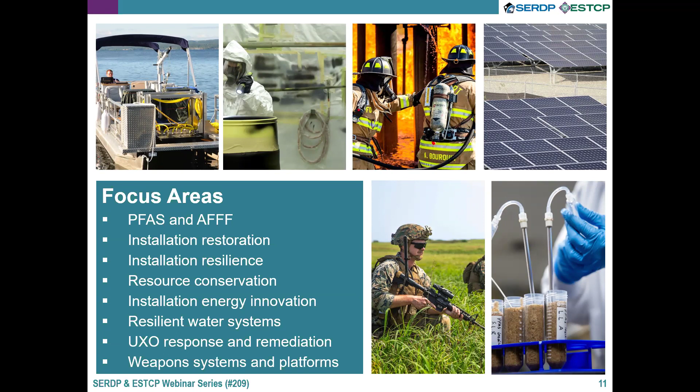ESTCP is the Environmental Security Technology Certification Program, in which we demonstrate and validate innovative environmental and installation energy technologies. These investments capitalize on past investments under SERDP or other research programs and are designed to transition technology out of the lab and into the field. Especially important in all ESTCP demonstrations is the ultimate transition to implementation and regulatory acceptance. Advances in science and technology provide the DoD with the tools needed to effectively manage and restore its assets to protect troops, their families, the public, and the environment. SERDP and ESTCP investments improve installation and energy resilience, environmental cleanup, UXO remediation, resource conservation, and the sustainment and maintenance of defense assets.

SERDP and ESTCP fund, monitor, and actively guide relevant and applied research, development, testing, and evaluation projects for the DoD's top environment and installation energy challenges. Our programs currently fund over 600 active projects. To maximize research impact, SERDP and ESTCP collaborate with top talent across sectors. In 2023, we funded projects at 77 academic institutions, 91 federal performers, and 52 industry partners. Our innovation and technology development inform DoD policy to ultimately improve environmental and energy management.

SERDP and ESTCP are funding a broad range of PFAS-related projects. You can access an overview of our PFAS programs as well as project descriptions on our website.

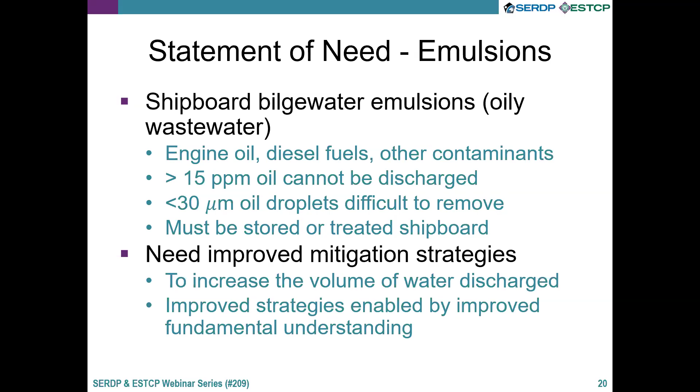Likewise, we look at firefighting foams. This is another complex multi-phase system. In firefighting foams, there's air, the bubbles inside the foam, water, and additives inside the water phase to create the foam, things like surfactants, maybe polymers, other compounds.

There's fuels—these are Class B firefighting foams, so they're spread on a liquid fuel. You can have emulsification of the fuel in the foam blanket, and the foam fuel vapor. You're trying to prevent fuel vapor transport across the foam, so you can have fuel vapor getting into the foam, and condensation of the fuel. The fuel is quite important for foam stability.

And then possible salts, depending on the water source. Maybe seawater would have quite a bit of salt.

Traditionally, these firefighting foams contain PFAS materials that work to enable film formation, so you have a foam over the fuel, and a thin liquid film will form between the foam and the fuel and spread across the fuel surface. This is remarkable because water has a high surface energy and the fuel has a low surface energy, and it's difficult to make high surface energy spread on low. But the PFAS materials have a unique property that enables that film formation and thermodynamic favorability for spreading.

However, these PFAS material exposures are known to associate with health effects, and now there's a need for improved formulations that replace PFAS. To enable improved formulation, we need improved fundamental understanding of how these systems are stabilized.

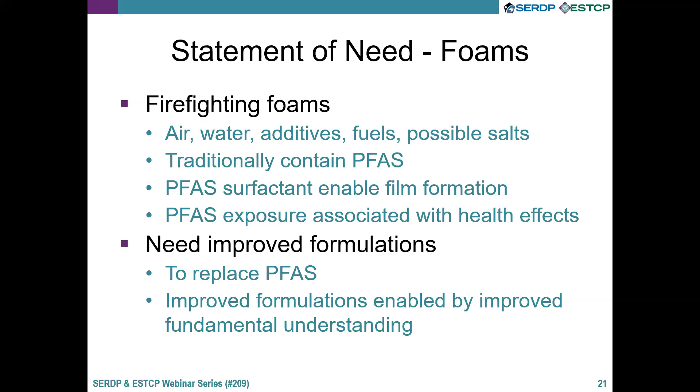Our group really focuses on the soluble surfactants and their transport mechanism—how they get to interfaces, and how they stabilize them—because both bilgewater emulsions and firefighting foams contain these surfactants.

These surfactants will move to interfaces through processes like diffusion as soon as an interface is present. Then, once in the subphase, the processes of adsorption and desorption occur until equilibrium is reached.

As these surfactants adsorb, they lower the interfacial tension and also lower the excess energy per area. That's important because oil and water, or water and air, want to phase separate. But when you lower the interfacial tension, you lower the thermodynamic penalty of having that interface there, enabling stabilized foams and emulsions.

But that behavior of the surfactant—how it gets to interfaces, and what's really going on at the interface, especially in dynamic conditions where things are changing, flowing, and there are gradients—really varies depending on the surfactant type, its concentration, and its local environment.

What's the viscosity around it? Even the size of the bubble or droplet matters—the curvature of the interface will inform some of the transport rates to that interface and the underlying transport mechanism.

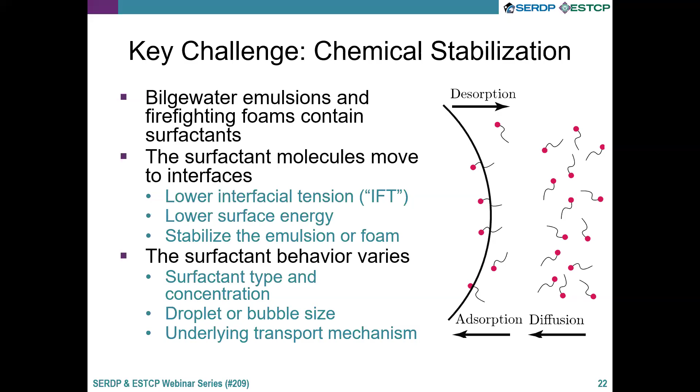So in our approach to study these soluble surfactants, we take two approaches. First, we measure the adsorption to a single interface. We do this with bubbles and droplets, across length scales.

We start with macroscale techniques like the pendant drop or a rising bubble, where the approach is to measure interfacial tension by looking at the shape deformation of the bubble or drop, then use the Young-Laplace equations to get surface tension from there. That uses gravity to help deform the bubble and drop.

Then we push down to microscale methods like the microfluidic tensiometer, where bubbles are deformed in flow, and static environments like the capillary pressure microtensiometer, through a collaboration with Joe Zasadzinski at the University of Minnesota, to measure transport to a highly curved interface at length scales quite relevant to our application.

But it's not just about getting surfactants to a single interface. Ultimately, in foams and emulsions, it's not just single interfaces but two interfaces near each other that matter. It's the thin films that form between bubbles, drops, or fuel droplets that inform stability. So we look at the film between two drops and two bubbles and study the film drainage and rupture time.

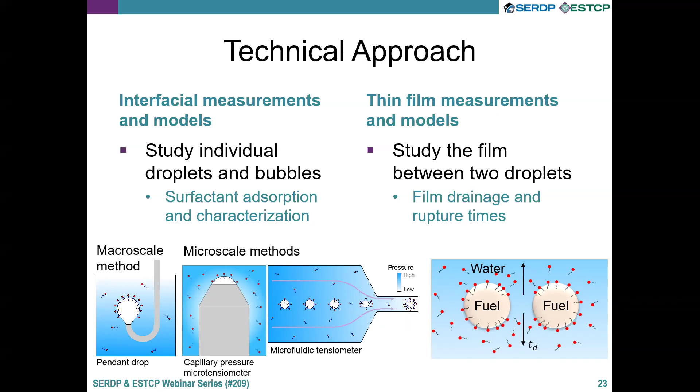We do this for a variety of systems. These are largely informed through collaborations with co-investigators at DoD laboratories, for systems relevant to emulsions and foams of interest. We look at hydrocarbon surfactants, alkylpolyglycosides, and siloxane surfactants and their mixtures that have shown synergism against fire, as well as informed by our prior SERDP effort with simulated detergent mix and bilgewater mixes recommended through Carderock.

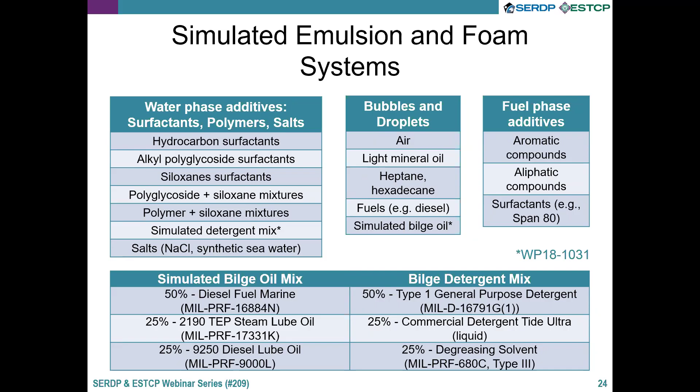Looking at these systems, for our water phase we add different things like salts, surfactants and polymers. Our disperse phase can be bubbles for the foams, the air, but it can also be things like light mineral oil to mimic engine oil, or different fuels in the simulated mix. The fuel phase itself can be quite complex, with different compounds, additives, and even surfactants present in those phases.

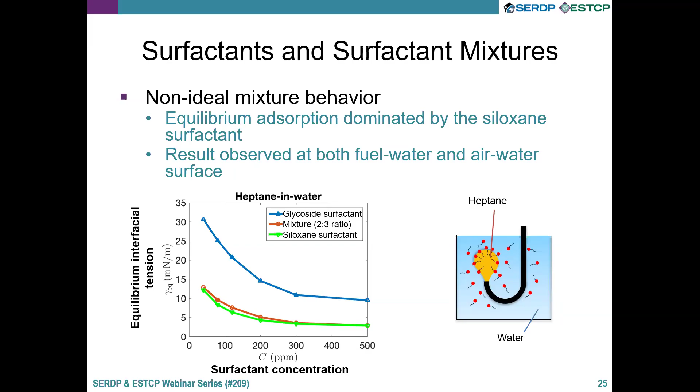Against the surface, you've got a certain region that would contain all the surfactant needed to cover that interface at equilibrium. So there's some volume at that bulk concentration that would contain the surfactant needed to cover the interface. As you begin to curve the interface and have more and more area, the depth of that volume will decrease—so the depletion depth gets smaller. That depletion depth defines the difference between the bulk and the surface, and it's the length scale for the diffusional mass flux. So it gets smaller and smaller, faster and faster, and you see this acceleration.

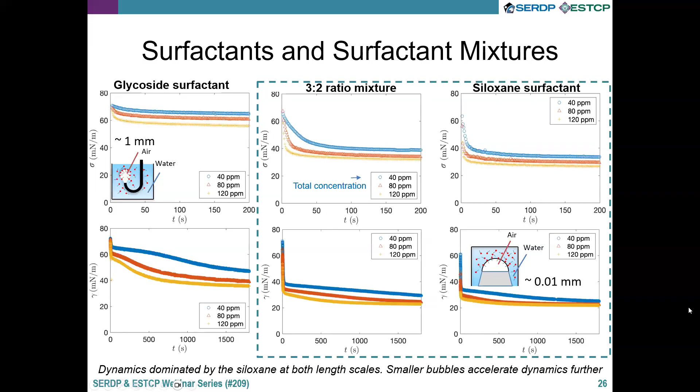We take those diffusion-limited measurements and begin to calculate traditional metrics like critical micelle concentration, the diffusivity by fitting the time-dependent response to a mass flux equation, maximum surface coverage—which is quite important, though it doesn't tend to vary much between surfactants—and things like equilibrium constants, depending on what isotherm you use. I'm plotting here some representative values of equilibrium constants for different glycosides and siloxane surfactants and their mixtures, and how they might compare to other common surfactants.

And so this varies over orders of magnitude, and it could potentially be a metric for the stability of the foam and film, because if you dig into this equilibrium constant, this is actually the ratio of the adsorption and desorption rate of the surfactant.

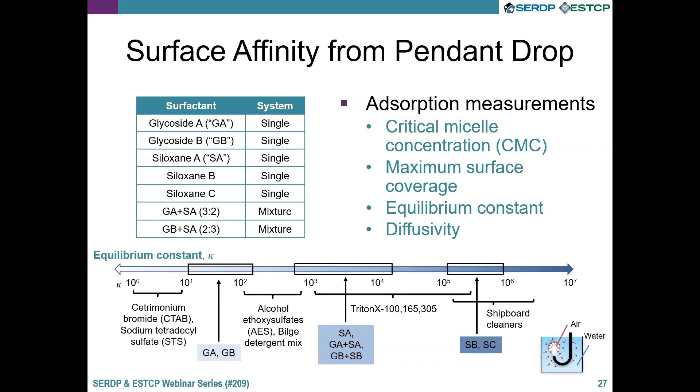Now from pendant drop, you'll just get the ratio, but if you have this other measurement technique where you can push yourself out of the diffusion limited regime, with the second method you can then not just get the ratio, but the individual rates. So you can tease out both the adsorption and desorption rate constants.

We do this as a function of concentration of surfactant, of temperature, and then I thought this was an interesting one to highlight: phase of the surfactant. So you can imagine a wet or a dry bilge, so oil and water or water and oil, but the phase that the surfactant's in will dictate the rate at which it's adsorbed.

And this is somewhat well known, there's a Bancroft rule of thumb that if you had water and oil and surfactant and you shake it up, do you get water in oil or oil in water? You'll typically get the system forming where the surfactant, whatever phase the surfactant is soluble in, tends to be the continuous phase. So it'll tend to form these Bancroft type emulsions.

And what we show is that when you have this configuration, you typically will have faster adsorption to that interface. So it aligns well with that rule of thumb, that you would have this be the stabilized system. So we're going to look into this a little bit more in a few slides.

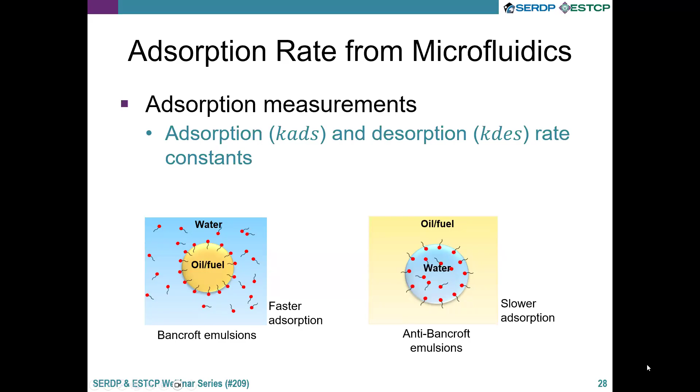In addition to looking at measurements to individual interfaces, ultimately we want to know how stable those interfaces are as they approach each other, because you have a number of thin films present in emulsions and foams, and coalescence between drops and bubbles is one of the key mechanisms for destabilization, among some others, and they're present in both emulsions and foams.

So we use microfluidic methods to create an array of droplets and bubbles, and we look at coalescence events. Shown here is an example with a number of bubbles formed as a function of Triton X concentration. You can see differences in their size distribution and in their coalescence dynamics. In general, the lower the coalescence frequency, the more stable the system.

And then we dig in closer where we look not just at ensemble kinetics, but individual events. We can use a microfluidic Stokes trap where we control the pressures in each of these channels, and there's a stagnation point in the middle, and we can trap one droplet or one bubble and then throw another one at it and look at the time it takes for those two drops to merge.

Coalescence is a really complicated process. You've got the outer problem of the rate at which they collide, the angle at which they collide, and then once they come in contact and you've got that thin film that forms between them, they don't immediately merge. There's a timescale associated with that film draining from a thick to a thin film.

That's largely dominated by changes in capillary pressure. And then a thin film to a very thin film, on the order of nanometers, where you'll start to have instability and rupture. So each of these three phases has its own metric and parameters that define it. But in general, the longer it takes, the more stable that foam and emulsion.

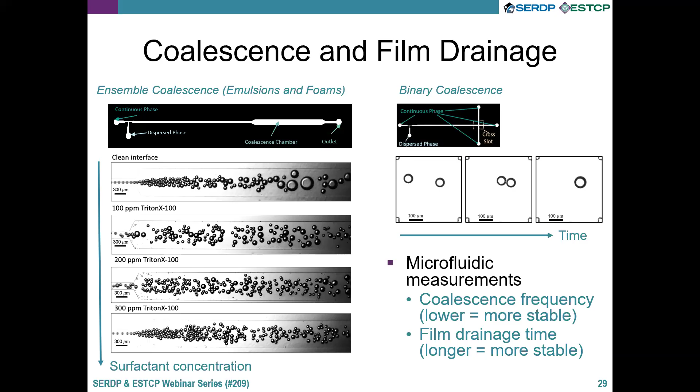So we look at coalescence across that wide range of systems I showed you earlier, including the effect of salt. I thought this was an interesting one to highlight because it's somewhat unexpected. Here we have salt in our water-rich phase, and surfactant is in the oil phase, so the only way the salt and the surfactants interact is at the interface.

I'm not showing you that first bullet point, but I can tell you that interfacial measurements show that if you add salt to that aqueous phase and this non-ionic surfactant to the oil phase, you'll see a decrease in the interfacial tension. This is well known, but if you're from outside this field it might be surprising, because salt typically increases interfacial and surface tension in the absence of surfactant. But it interacts with the surfactant so much that it will decrease the interfacial tension when the surfactant is present.

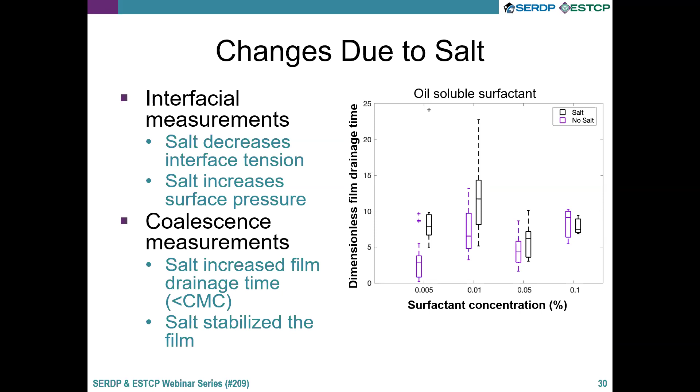And then we look at the coalescence, the dimensionless film drainage time versus concentration. And what we see is that below CMC, the critical micelle concentration, we see increases in the drainage time. It's more stable in the presence of the salt than without the salt, corresponding well to those interfacial tension measurements.

So we look at the effect of additives as well as the effect of viscosity of the fuel phase. This is important because fuel can really range in viscosity because of differences in temperature, but also just inherent to the fuel. Some fuels are less or more viscous than water.

And that viscosity is quite important. Viscosity in general will slow things down, but the ratio will be important. If I had a highly viscous drop, a highly viscous fuel drop in water, and you're trying to coalesce them, it's quite challenging. Even in the absence of surfactant, if you had hexadecane droplets, it's quite difficult to have them coalesce, largely because you're changing the surface stresses and you're changing the mobility of the liquid in that film phase as it's draining.

Conversely, if you had low viscosity droplets, like heptane inside of water, then they more readily coalesce, even in the presence of surfactant.

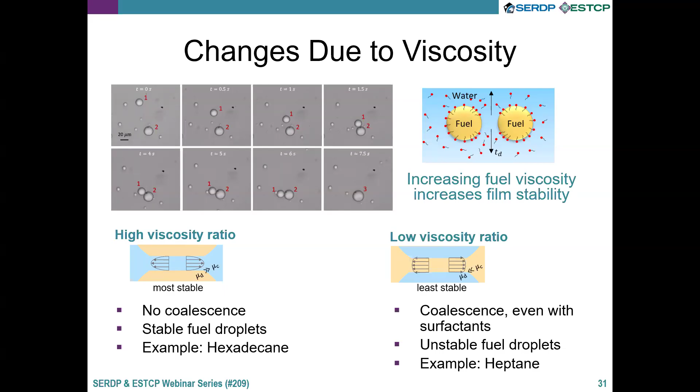So surfactant is important, of course, and in general, if you add surfactant, you stabilize the system. And that's what we see for the most part for most systems, increased film drainage time versus surfactant concentration.

But there are some circumstances where we see some non-monotonic effects. So for example, if you had surfactant in these anti-Bancroft type emulsions, where the surfactant's inside the water phase and we're coalescing it inside this oil, we'll see initially an increase in the drainage time, just like you would expect with increasing surfactant concentration. But then if you add even more surfactant, it actually hurts the stability. It tends to drop down the drainage time up to a point, and then you get quite a bit of scatter in the data.

For Triton X surfactants, we see that scatter happen at CMC. These glucopones, we see them at a little bit lower concentration, but it's a somewhat surprising non-monotonic effect.

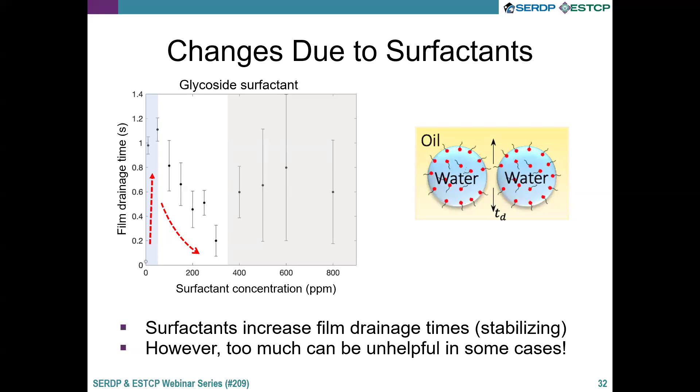So we have all these observations that are interesting, or some are expected, and we take these measurements and then we couple them with some modeling, some fluid dynamic modeling to capture that thin film. This is in collaboration with co-investigator Satish Kumar here at the University of Minnesota, and our co-advised graduate student Xu Yang, and she's looking at the stability of this thin liquid film that forms between the bubbles and the drops. And we think about what are the forces that stabilize and destabilize them.

And one of the key destabilizing mechanisms is because of van der Waals interactions, intermolecular interactions that happen between interfaces, captured by the disjoining pressure, which has what's called the Hamaker constant in it. And for any interface, there's always natural fluctuations because of this natural fluctuation of kinetic energy, thermal energy. And as you have that fluctuation, you'll have moments in time where you have a bit of a trough and a bit of a peak that form.

And for a thin enough film, you'll have quite a difference in the strength of that attractive van der Waals interaction, that the area where it's quite thin, or a little bit thinner than the thicker area, it'll feel a much stronger attraction than the thicker region because of how strongly it depends on the thickness of the film. These will really kick in around 100 nanometers or less. And so these thin areas will have a driving force to get even thinner, and the thick areas even thicker. And that's how you'll get rupture in these thin films.

But these forces are counteracted by stabilizing forces. The first is capillary leveling, that if you had two systems at equilibrium and a flat interface between them, the pressures are the same on both sides. But the moment you have a curved interface, you have a Laplace pressure difference. And so inside bubbles, inside droplets, there's higher pressure than outside of them because of this Laplace pressure needed to stabilize this interface.

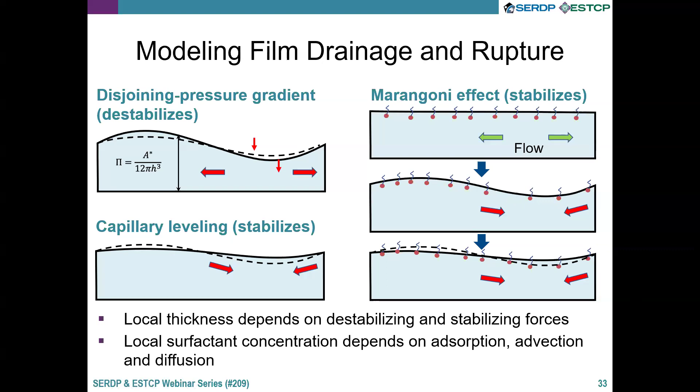So we begin to model monolayers and bilayers, ultimately trilayers. For the bilayers, I'll pause to mention this itself could be interesting to the application, that you could have a thin liquid film of water form on top of the fuel, and we could look at the stability of that thin film in the presence of these surfactants.

We looked at a number of different components, a wide parameter space, but the one I want to highlight here is what happens with the concentration of surfactant. So you're looking at dominant growth rate, a term from linear stability analysis. The higher the rate of growth of an instability, the faster it would rupture.

So this is quickly rupturing. As you go to low dominant growth rates, it's slowly rupturing. So less stable for high values, more stable for low values. And then log of Marangoni numbers, you could think of that as a metric for the concentration of the surfactant.

As you add surfactant, you stabilize the system, regardless of what interface, although depending on what interface, you stabilize it to different degrees. But what's interesting is if you add too much surfactant and you drop the interfacial tension too much, you actually can destabilize the system.

So Marangoni stresses are always stabilizing. But what happens here is you're dropping the interfacial tension so much that you're suppressing that stabilizing capillary pressure difference. And you're also suppressing and decreasing the capillary length scale, making your interface easier to deform. So in these really thin films, that becomes quite important, and you can cause rupture to happen more readily. So you can have enough surfactant to help, but too much could hurt in that scenario.

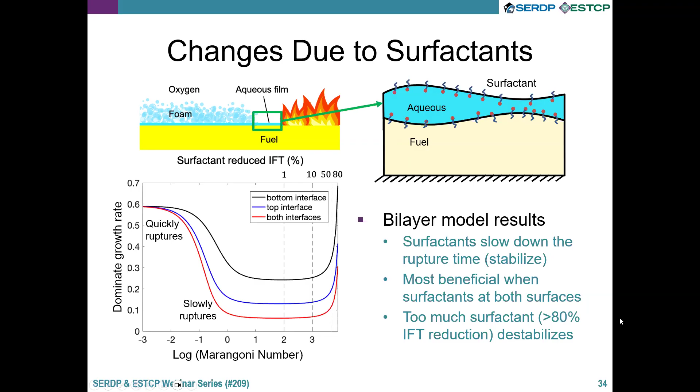So that's the non-monotonic effect. And then we built up to the tri-layer, so now we're more closely mimicking the emulsions and the foams, where you would have a disperse phase and then the thin film between it. So here, when you zoom in, you would think of the film of interest as this is actually the continuous phase, that's what's the film between the two disperse phases.

And then these outer films would be a mimic of the drop phase. And so we look at this as functions of surfactant concentration and even looking at different rates of diffusion limited, adsorption limited processes, and even viscosity ratio like we did in the experiments. And in general, if you increase the viscosity, you do tend to slow things down. But just like with the experiments, the ratio matters.

If you have a more viscous droplet phase or a more viscous outer phase, you'll stabilize the system more than if you had the other way around. And what's nice about the modeling is you can begin to zoom in not just on the thickness of the film, but also the surfactant coverage at the location, and you can recover velocity gradients.

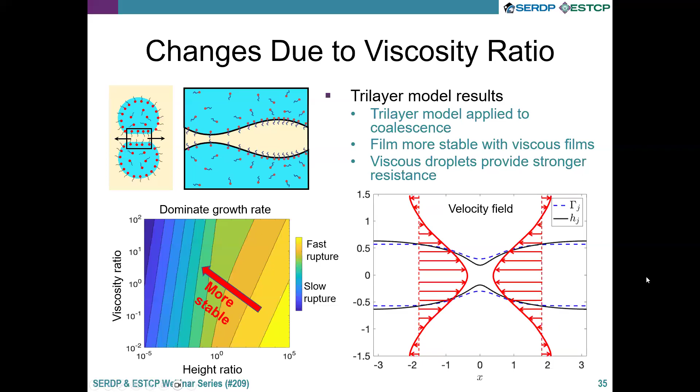And so you can begin to tease out some more complex mechanisms of stability, like that Bancroft rule. So if we add surfactant to different phases, as we saw earlier in the experiments, we saw these faster adsorption when surfactants are from the outside and the inside, and these tend to be the more stable system. So we looked at the same system, but in the thin film environment.

So what's happening is when you're coming from the inside, where you have these two surfaces in this thin area, versus outside, you have differences in the concentration gradients that are set up in the fluxes at the interface. So you'll have different rates at which the surfactants will adsorb, and you can erase some surfactant concentration gradients at the surface that'll weaken Marangoni stresses and then either stabilize or destabilize that interface.

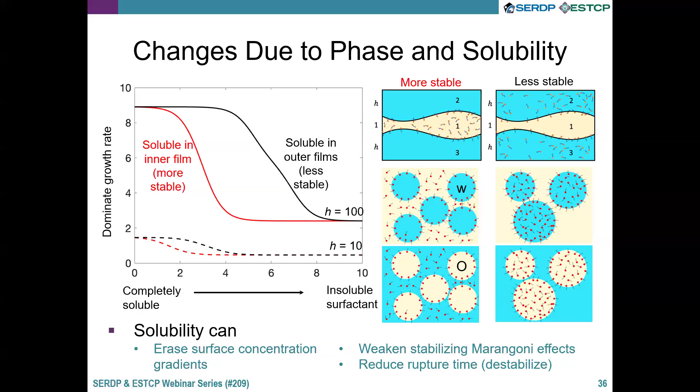We've looked at a number of different scenarios with the modeling and with these measurements, and we can look at the effect of composition of surfactants, salts, and fuels on the adsorption and on the stability. We did polymers as well, I just haven't mentioned it in this talk. We focused on both the equilibrium properties, but really trying to get at dynamics and seeing that this faster surfactant will dominate the behavior.

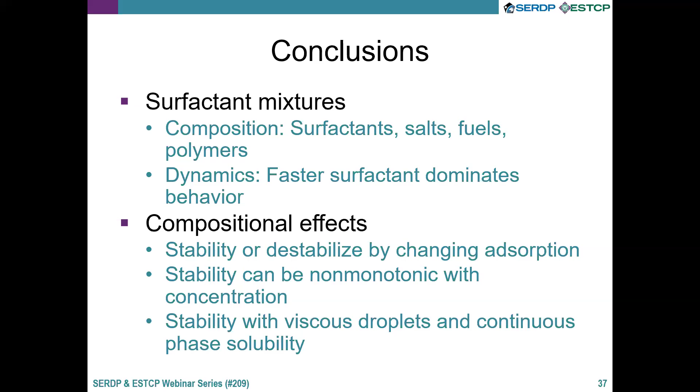We also looked at compositional effects, and we found some surprising and some expected behaviors where you see changes of stability with changing adsorption. We also saw the non-monotonic effect from concentration, and then stability with these viscous droplets and continuous phase solubility.

We did this with these end applications in mind. So all the systems we looked at were informed by systems that are typical to these bilgewater systems or firefighting foams, and have enabled some new measurements and modeling platforms, as well as some modeling methods and results that can be used in a diagnostic way to inform operation, mitigation strategy, and formulation.

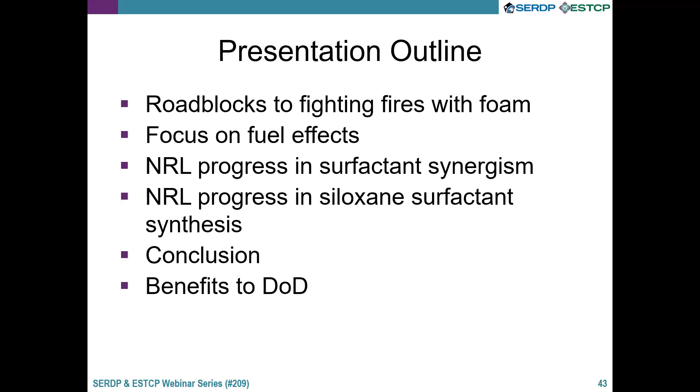I wanted to go over the history of AFFF and the use of foams to fight fires. Foams have been used since the 1940s to extinguish liquid fuel pool fires, specifically because when you have a fuel pool on fire and you try to put water onto that surface, since water is more dense than the fuel layer, the water just sinks below the surface, and you're not actually applying an agent to the fire interface at the fuel-air interface.

When you use a foam, the foam is less dense than the fuel, and the water that is in that foam layer cools the fuel surface and acts as your fire suppressant.

In the 1940s, it was acceptable to just use anything—soaps, protein-based surfactants—and it was deemed good enough to extinguish a fire. However, there were situations, particularly for military use, in which that was just not good enough.

We would have situations where as soon as a firefighter extinguished one area of the flame, it would reignite. This is a really big deal when you think about large pool fires. You might picture a small grease trap, but you have to think about this on the scale of an entire flight deck, a very large area on fire. As firefighters move forward into that fire, they need assurance that the area already extinguished is not going to reignite. This was not the case for these inferior protein-based foams.

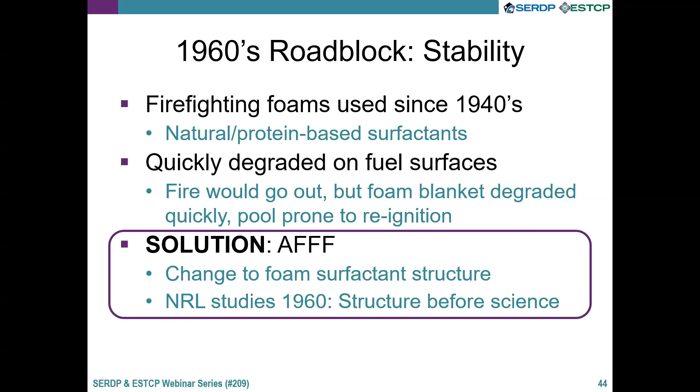In the 2000s, there was the big realization that the fluorinated surfactant used in these AFFFs had a byproduct, PFAS, that would go into the ground, and the fluorinated tail of the surfactants just wouldn't degrade—it would stick around in the environment for a very long time. There was a huge push to find replacements for these surfactants in firefighting foams. Unfortunately, between when AFFF was introduced and when we needed to find replacements, science had caught up and showed that the surfactant is quite key to the fire extinction process—that the surfactant itself, potentially through a variety of mechanisms, is what is actually extinguishing the fire.

It's not necessarily just the presence of the foam itself creating that barrier delivering that water - their surfactant is really key, and not all surfactants could extinguish a fire. Because they were focused on the importance of the surfactant in AFFF, it was really hard to find an alternative surfactant. So what ended up happening is there was a reliance on natural and protein-based surfactants that had been developed and were considered more environmentally friendly.

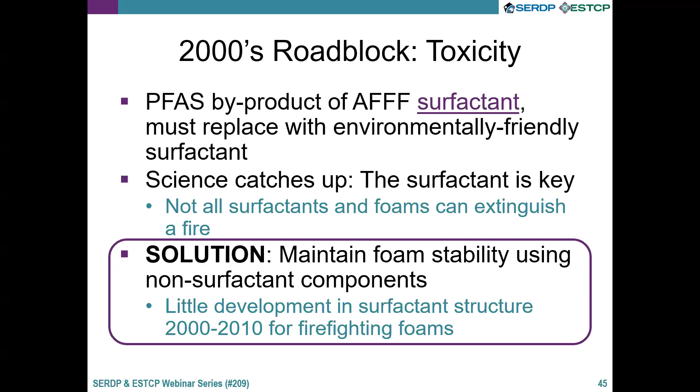But could we add things to these mixtures to just make them better? So instead of focusing on a massive change in surfactant chemistry, can we make small adjustments through additives and other ingredients that will help get our firefighting foam to the level of AFFF without having that fluorinated component? There were significant developments in understanding foam solution and foam property behavior, but most of it was not surfactant based. So there was a lot of gap time in trying to better understand firefighting foams in which surfactant development was not the key.

Slide 46. What was the key at this time was additives and the focus on the foam layer and film formation. AFFF, aqueous film forming foam, refers to a foam solution that has a low enough surface tension that an equation based on the spreading coefficient is positive. The only way for this to happen, to thermodynamically have a film spread onto a fuel surface, is if your foam solution has a significantly low surface tension.

Fluorinated surfactants achieve this - they have solution surface tensions less than 20 millinewtons per meter, and that was what people were focusing on. People were focusing on this film, the presence of the film in fire suppression.

And if you couldn't achieve it through surface tension, could you achieve it through something else? There was this idea that liquid drainage from the foam could be very key in fire suppression. Could you get something that drained slow enough over time that it could create a pseudo film layer? To get that slow drainage, you needed a very stable foam, and you needed to increase solution viscosity. You ended up with very thick fluorine-free foams trying to recreate this film formation that was not thermodynamically possible.

But in considering both of these mechanisms, it's understandable how we would measure foams and come to these conclusions, but they're really void of the fire environment. Both of these measurements don't really consider how foams behave in a fire environment. And at NRL, we wanted to probe that further.

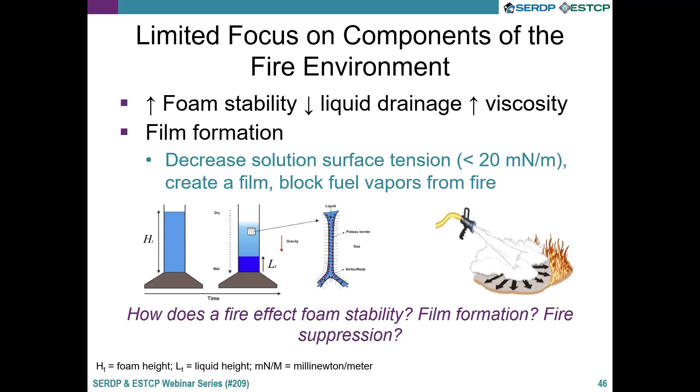Slide 47. So what we found is, let's just take some components of a fire environment. For us, a major component was the fuel. Looking at when you have a fuel pool and it is on fire, what does the presence of the fuel actually do to the foam? We ran these very simple experiments - these are just 4 beakers with a 4 centimeter foam layer in them.

It has a control where the foam is placed on nothing. We have one type of fuel in the second beaker. In the third, we have the foam placed on water. And in the fourth, it is a different type of fuel. As you go down the figures, it's the time at 0 minutes, 1 hour, and 5 hours.

What we found is that the fuel accelerates foam degradation - when you compare the foam over the control or over water, the foams over the fuel degraded faster. So there's something about the interaction between the foam and the fuel layer that we thought was really important for fire suppression.

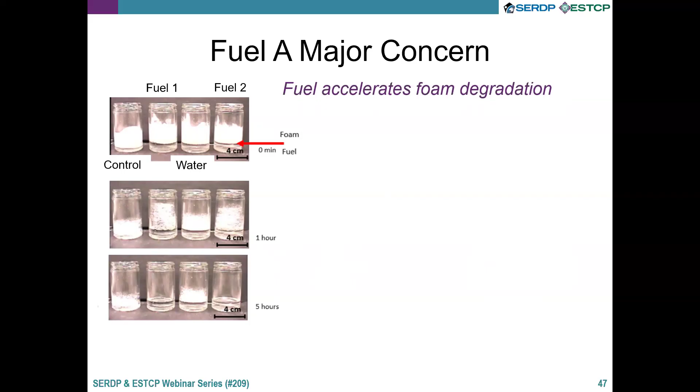So it wasn't just this film formation, but a clear indication of stability of the foam in the presence of fuel. We really wanted to better understand this fuel foam connection, and thought that this was what needed to be focused on, instead of just film formation and foam properties in the absence of fire elements.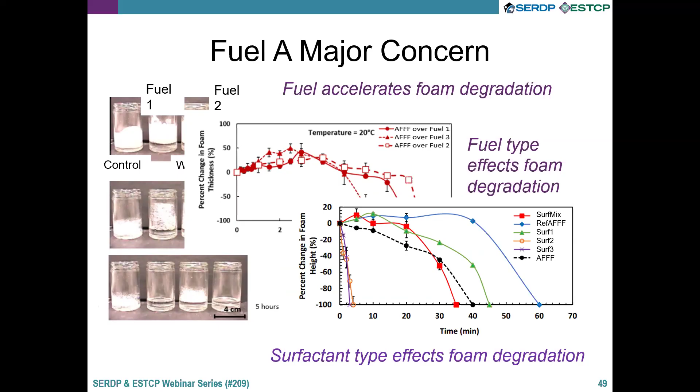So we started to think more about this fuel foam interaction and what would be causing the degradation of the foam surface. An idea that we had is we were considering: you have the fuel layer and the foam layer, and fuel vapors that leave the fuel pool surface and travel through the foam layer. How do they travel through the foam layer?

Each bubble of a foam is surrounded with surfactant that is oriented with the head of the surfactant in the water layer and the tail of the surfactant in the air layer. As fuel vapors come across those interfaces of each bubble, it interacts with the tail structure of the surfactant first. We were considering the fluorinated surfactants and the fluorinated surfactant tail, which is not only resistant to water, but because of the structure of the bonds and the way it interacts with itself and with water and air, it is actually very oleophobic as well.

And it retards fuel transport through the foam layer. You end up with foams that do not have a significant amount of fuel vapor within their foam layers, making them stronger with time. However, if you have a hydrocarbon surfactant where the tail structure is almost identical to the fuel molecules, you have very easy transport through your foam layers, and you get a higher concentration of fuel vapors within your foam layer with time, which degrades your foam. So we were really looking for something that could mimic this oleophobic nature of the fluorinated surfactant.

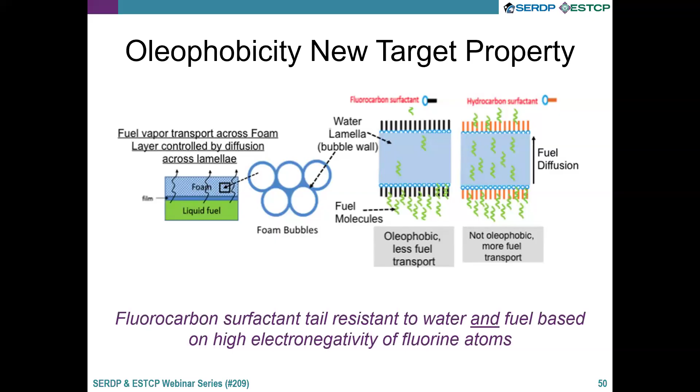And where our research kind of took off was looking into silicon-based surfactants. So we had a hypothesis that you do want to mimic behavior of the fluorinated surfactant. What is the behavior we really want to mimic? We weren't necessarily looking to mimic the low surface tension ability of the fluorinated surfactant, or to mimic film formation, but we thought there was something about this oleophobicity, how the fluorinated tail just doesn't like anything.

So you can see the structure of the fluorinated surfactant with the tail group highlighted in yellow. Fluorine is just a non-stick chemical. It's what's used in Teflon, it's what's used in non-stick coatings, because it really doesn't like to interact with anything. So we were considering other things that also don't like to interact with anything, and this is where silicon came into play.

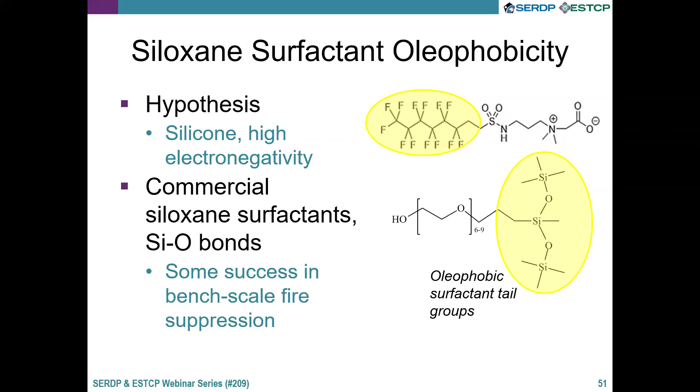There was some evidence already from other research groups that silicon surfactants might be replacements for fluorinated surfactants. However, it was highly based on the idea of film formation, that silicon surfactants produce solutions with low surface tensions - not as low as fluorinated surfactants, but that's why they were targeted as potential replacements, because of film formation. Our research group wanted to focus on their role in stopping fuel transport through the foam layer and maintaining foam stability over fuel.

And where to begin? We had this idea of a siloxane surfactant. We knew we wanted to incorporate it into a firefighting foam, but how do you do that? Where do you even start?

We took some wisdom from manufacturers that said individual surfactants aren't particularly good at extinguishing fires, and commercial products use mixtures of surfactants and additives to actually make something that can extinguish a fire. So what we did is we took individual components: a fluorinated surfactant, an alkyl surfactant, and solvent, and mixed them in different ratios until we were able to develop a formulation that could match that of a commercial AFFF.

We refer to this as our reference AFFF. It ended up being a 3-to-2 ratio by weight of a fluorinated surfactant and this alkyl surfactant, at a total concentration 6 times its critical micelle concentration, with 0.5 weight% solvent to make sure the surfactants dissolved readily. We were able to get a 28-foot squared gasoline fire to extinguish in the same time as a commercial product.

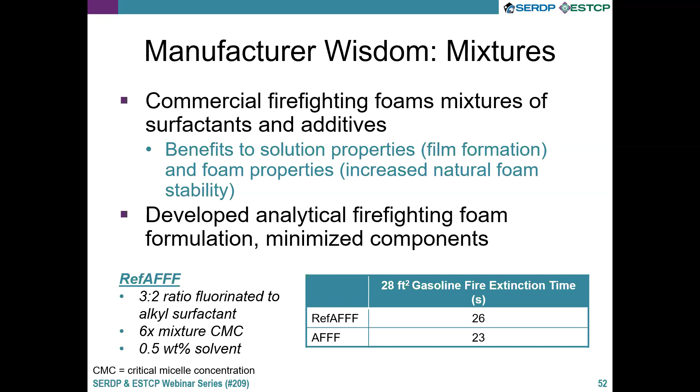So we used that ratio, swapping out the fluorinated surfactant for a silicon one, to really determine the potential performance of these silicon surfactants.

This is where we identified synergism and the wisdom of the manufacturers and commercial products. We identified one commercial siloxane surfactant referred to as 502W. These are image stills of a 19-centimeter pool fire, with foam deposited into the center. For the 502W, within 40 seconds, the fire has not been extinguished.

We look at the other component of the mixture, just the alkyl surfactant that we added in that 3:2 ratio. If you look at just the alkyl surfactant, at 10 seconds you can see that the foam has covered the pool fire. At 20 seconds that coverage is still there and the fire is still not out. At 40 seconds, the fire is still not out.

And yet, when you mix the two materials together, we were able to get fire extinction within 40 seconds, which was very exciting to see synergism, not just in solution or foam properties, but a clear indication that mixing these two components together gives synergism in fire suppression.

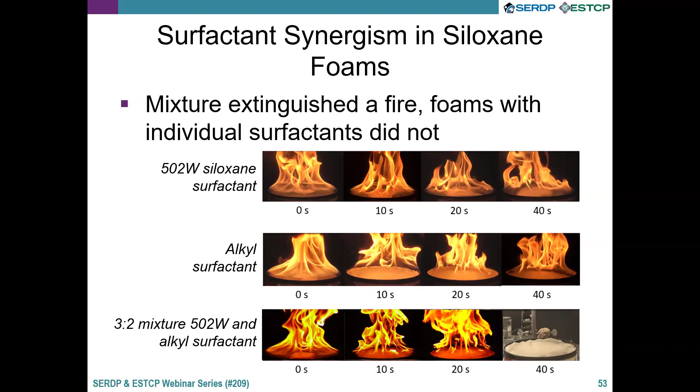We were very excited about this mixture, especially considering we had examined other commercial surfactants - 14 products at least that were silicon containing, 15 that were not silicon containing. Out of that multitude of products we tested in a 3:2 ratio, one extinguished our 19-centimeter pool fire, and it was this 502W formulation.

We decided that at bench scale we would keep playing around with it. The 3:2 ratio for the reference AFFF was just a starting point. We mixed the ratio, looked at different alkyl structures, and did as much as we could through iterative changes to improve extinction times and synergism.

When we got to the point where we thought we had really optimized the structure, we took it from our bench scale 19-centimeter to a larger 28-foot squared gasoline and heptane pool fire. The 28-foot squared pool fire is a qualification size for military firefighting foams - the size used to evaluate foams for military use.

For a foam to qualify for military use under AFFF considerations, the gasoline fire extinction time must be under 30 seconds. Heptane is not a requirement, so it doesn't have a qualification, but we tested it because it's a neat fuel that is consistent with time and batches, and it's a good fuel for bench scale evaluation.

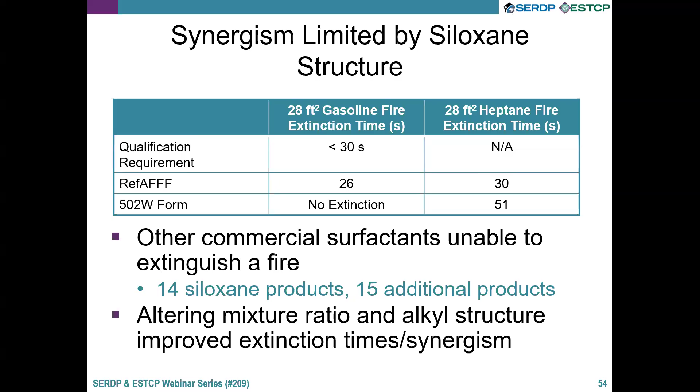The reference AFFF had almost identical times between gasoline and heptane, and our modified, improved, optimized 502W formulation showed no extinction on gasoline and a much longer extinction time on heptane. So despite our optimization at bench scale, we were still far away from reaching the AFFF target.

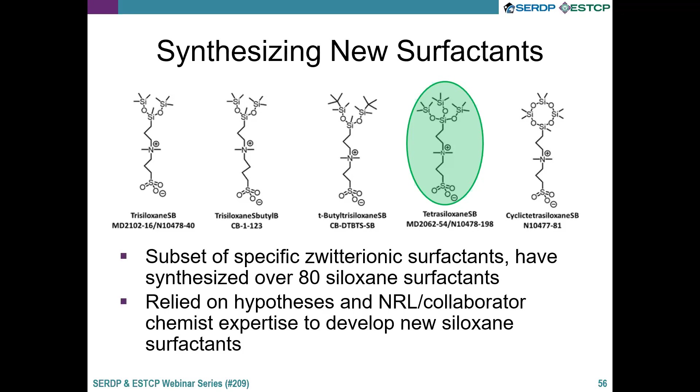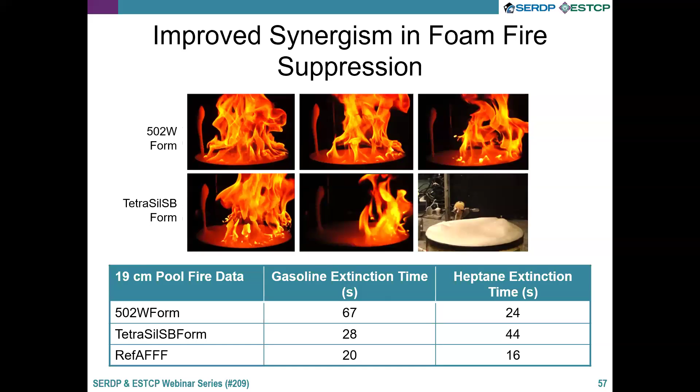However, we're still missing out on some dynamics that are fuel dependent, because if you look at the heptane extinction time, the 502W has a much closer extinction time to the reference AFFF than our zwitterionic formulation. So although we improved extinction on gasoline, we made performance on heptane slightly worse. AFFF seems to be impervious to the fuel type, and it's very interesting, something we are following up on, how to make a surfactant that would accommodate different fuel types. But we're very excited about this zwitterionic formulation, and are going to continue optimizing it through different ratios and different alkyl surfactants to improve and optimize fire suppression performance.

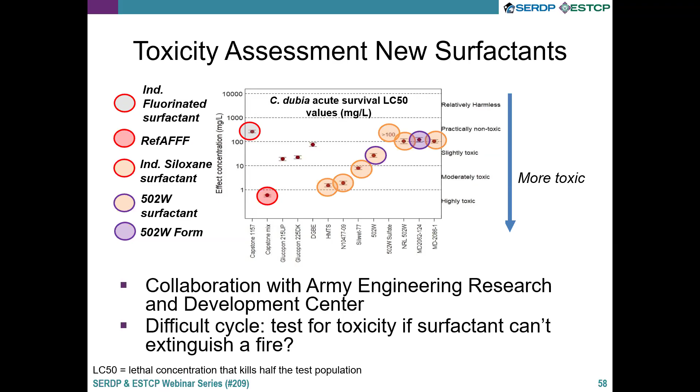Slide 59. So that is a big continuation study for us, the toxicity of this new zwitterionic siloxane mixture, looking at the aquatic toxicity of the material individually and as a mixture. This fuel dependency is something we will focus on in our research as well, especially the difference between gasoline and heptane, and how we can optimize a fluorine-free material with matched performance on different fuels. Another thing to point out specifically with siloxane surfactants is shelf life stability. The silicon-oxygen bonds tend to hydrolyze, so they degrade in aqueous solution quickly. Once we find an optimized structure, we will begin to optimize a formulation that will be more shelf life stable. Slide 60.

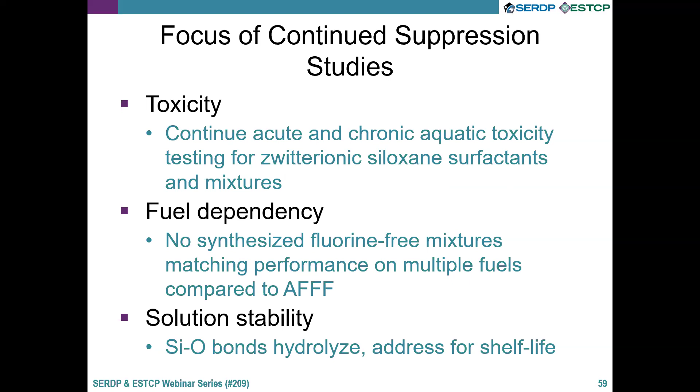In conclusion, we definitely feel that the fuel-foam-surfactant interaction is key to understanding and developing rapid fire extinguishing foams. This can be achieved by optimizing mixtures, surfactant oleophobicity, and the balance between the surfactant head and tail group. But the parameter space for those three things is infinite, and we need much better small-scale testing to better identify these fuel surfactant interactions, optimize faster, and identify the appropriate components for firefighting foams. Slide 61.

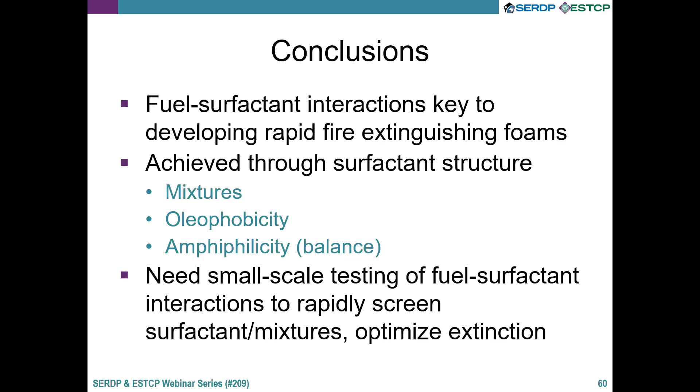This greatly benefits the DoD through the use of new qualified foams for military use, coming up with an ideal, optimized mixture that can be used by the fleet. That is our goal, and something we continue to strive for—rapid fire extinguishment with long burn back capability.

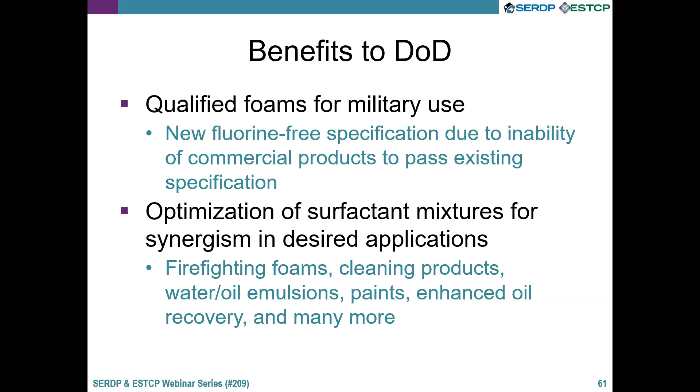And for more information about our specific experiments, we have a long list of publications. It has been a joy to work with collaborators on these projects and to gain a deep fundamental understanding of fuel surfactant systems for firefighting foams.

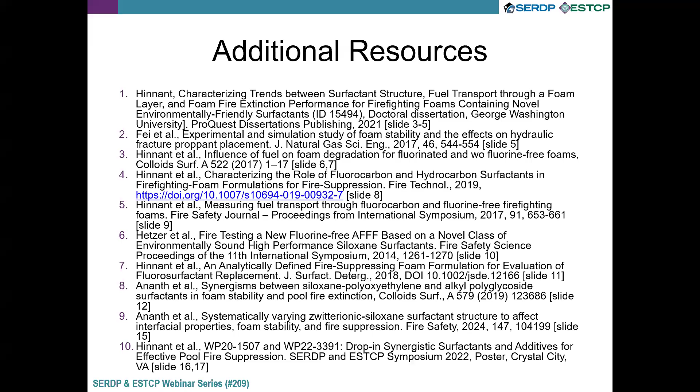Our project pages are here for additional information, and I thank you for your time.